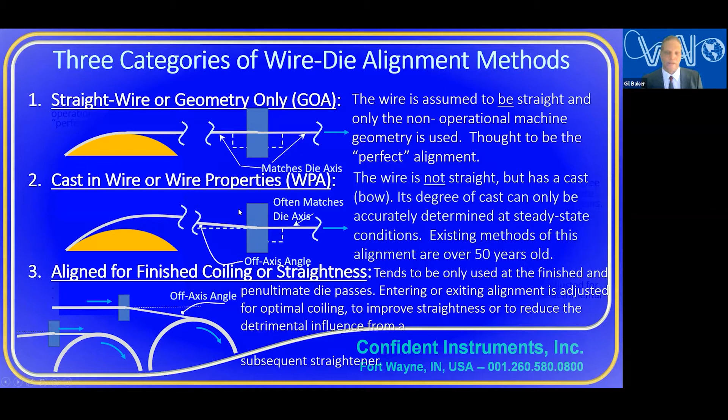We could discuss aligned for finished coiling or straightness - another category where manufacturers purposely put an angle from the exiting wire to the die axis, or they could put an angle from the entering wire to the die axis. This will control the cast and the helix on the finished wire so that you can spool very nicely onto the spool, giving more optimal spooling. It's also used to optimize straightness or to minimize the impact of a straightening device afterwards, because they're useful, but straightening devices also will impact the quality of the wire.

I was working on a robotic microphone about 2 decades ago, and I met somebody from the recording industry, which I wasn't familiar with, and he wanted to tell me something. He said an inch is worth $1,000. What he means is that moving the microphone to the right place - here you see 3 different microphones, they might switch back and forth or combine them - moving it into the right place to hear the music, even an inch, can be worth $1,000 worth of expensive recording equipment. I think this is a very good analogy for what we're doing.

We're moving the alignment of the die just a little bit, maybe half a degree, and that is creating an improved condition in the die without increasing the quality of lubricant, the quality of dies, or any other expensive issue. It's quite interesting, this analogy, because, for example, if someone told me to put a microphone near a guitar, I'd put it right at the mouth of the guitar. But that's not the optimum - the optimum is further away. I don't know why; the sound is coming from everywhere, not just the mouth, I assume. But again, die alignment is also non-intuitive.

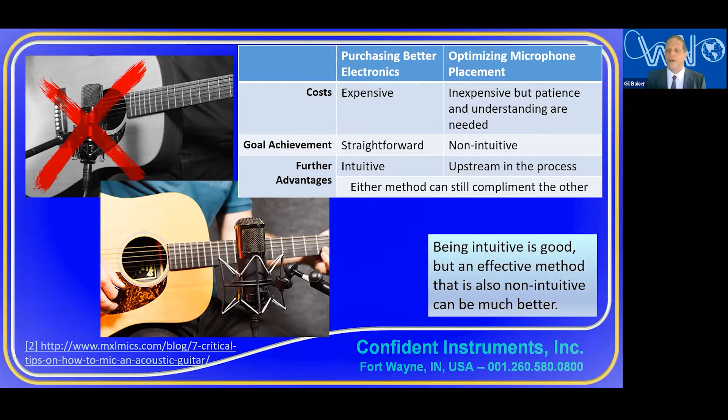A further advantage is that the microphone movement is upstream in the process. It captures the initial sound, and then it's processed later by the expensive equipment, which still can be expensive. Similarly, in die alignment, if you don't have the die aligned properly, it doesn't matter how much expense you're putting into the lubricant and die - there are still going to be issues that could have been resolved.

Let me go over what we're going to discuss today. I'm not going to get to everything, but I'm talking about a different type of alignment than straight alignment. We won't talk much about straight alignment, but this alignment is straight - it just depends on the geometry and the equipment. I'm talking about when there's a strong cast or a bow in the wire, how you have to optimize it with a different technique. And I'll discuss what processes can especially benefit, and touch lightly on measuring the alignment.

Now I'm going to really go into this subject for a while. What I'm discussing here is deconstructing typical wire drawing, because a lot of times we just see wire drawing as a picture of a die, and there's a lot more going on.

Existing alignment methods for using this alignment with the strong cast have been in use for over 50 years. There's a number of methods - I put some in my article, but I'm going to touch on two low-cost methods today and assessments for aligning the die. I'm also going to talk about laser alignment measuring methods - I'll just touch on that.

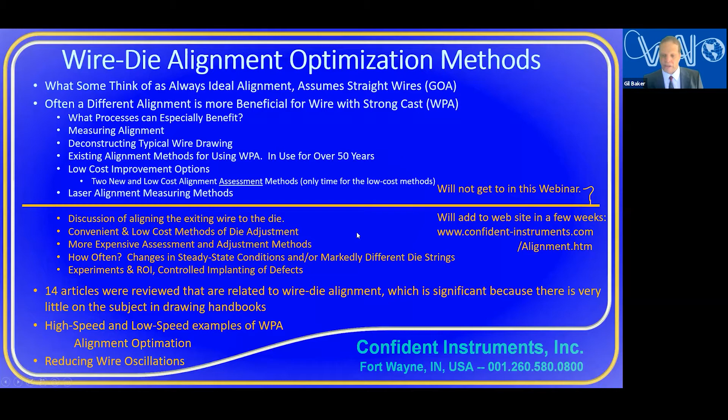Now, what processes can especially benefit? Number one, hydrodynamic lubrication, of course, is great. It's a great boon to wire drawing as you go at a higher speed, but it's a very fragile dynamic. The film thickness from the lubricant is fragile. Anything that would disturb it is going to reduce the film thickness and cause more frictional heating and contact between the wire and the die.

So when you just have slight perturbations to the hydrodynamic lubrication, either through this unoptimal alignment or through wire oscillations, you are deteriorating your hydrodynamic lubrication. The wire temperatures are going to increase.

And that brings it to the next one - when you want to reach higher drawing speeds, you really need to keep the wire temperature lower, because if the wire temperature gets too high, then you cannot draw faster at all. This is especially true in steels, where higher temperatures can cause brittleness.

And finally, there's where you have a finished straightness needed. Then again, really pay attention to optimizing the alignment for maximum straightness. And even if you're straightening afterwards, you want to minimize the impact of your straightener.

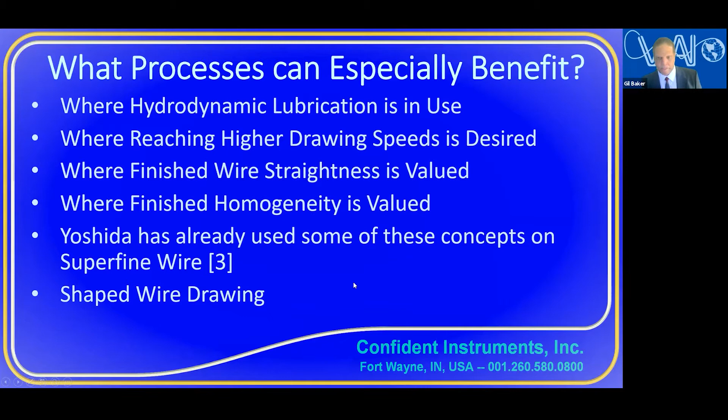I'm going to go back to these two categories one more time. So you have straight wire, and that is only governed by the geometry of the machine. You're assuming the wire is traveling straight between the capstans and the spools or whatever, and it's only governed by the geometry. People assume that's the perfect alignment.

What I'm discussing mostly here is what I call the wire properties alignment. I say wire properties because when the wire properties change, the alignment must change. A lot of times it will change just a little bit, but if you have to string a new die set that's dramatically different than the other die string, then that causes a big change - for example, in number of wraps, die back tension, things like that.

So this type of alignment is important when there is a cast in the wire. And it's really easy to measure whether there is a cast in the wire or not, and how much significance that will play. So we'll get onto that later.

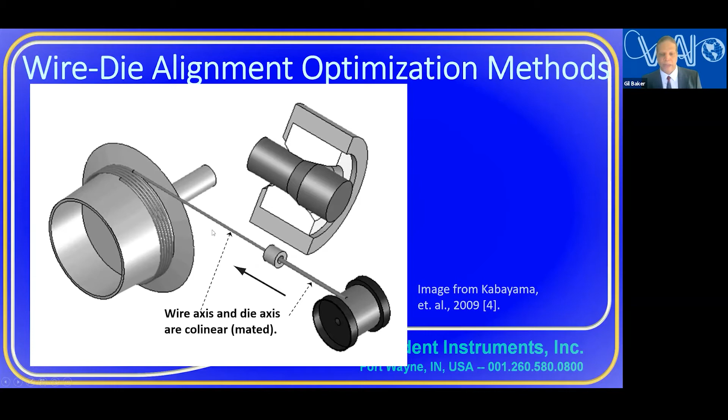So again, this is a picture of straight alignment. The wire is just - you're coming off the spool, going into the die and going onto a bull block. And again, the wire axis and the die axis mate here and here, entering and exiting.

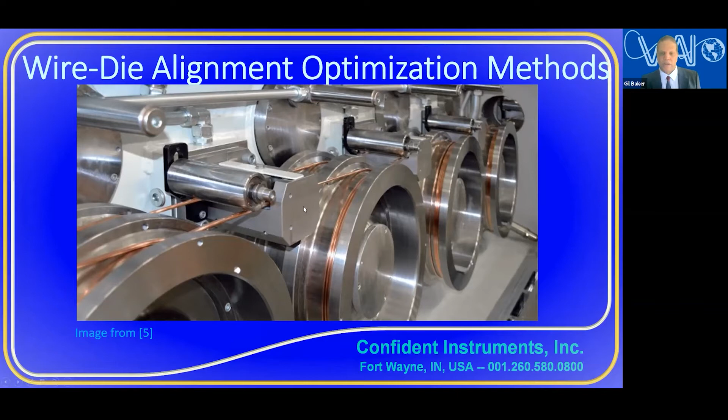Here's another example, but here you have a roll that seems to be adjustable, and that's going to change your alignment. There's a lot of things that will change even straight alignment. I'm not going to discuss that here, but I just want to make people aware that as we add different complexities, such as cone type and other complexities, we are going also off the straight alignment.

Alignment measuring - if you want to measure the alignment, a lot of times the die holders are already aligned coming from the OEM. So they're fixed, and a lot of times people don't even bother checking what position they're in. But actually, even some OEMs will put in a different alignment. You might be surprised. So you could check that, but you might be happy with how it's set.

A lot of people like to use a laser. There's intricacies with using a laser that we're going to go into later.

But they use it because it's used for machine alignment.

Another option is a taut flexible string. Again, this is only for straight alignment, where the string will be fully taut, and the string will be straight due to the tension wherever it moves.

You could do a similar thing with an insulated stranded wire, stripping half the wire and leaving insulation on the other. The change from insulated wire to bare stranded wire gives you a change in diameter similar to wire drawing. You could also use the bare stranded wire as a continuity check between the die and the wire, such that the strand will pass straight through the die when it's perfectly aligned.

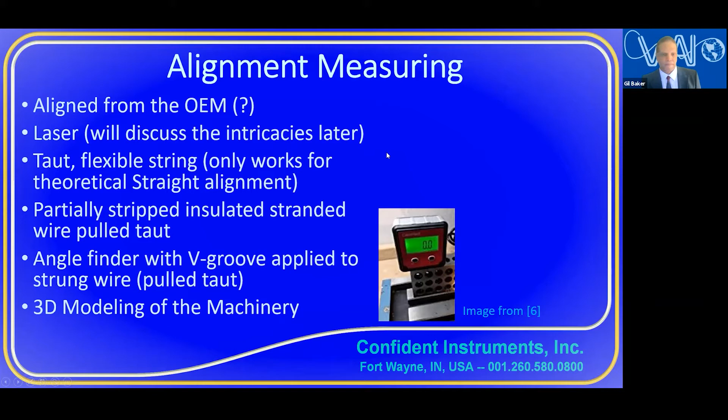This is what I'm going to really stress in this presentation: deconstructing typical wire drawing. Again, a lot of times you'll see a picture of wire drawing with a die and a nice conical wire going through it, but there's a lot of other things going on, maybe in the background, so to speak.

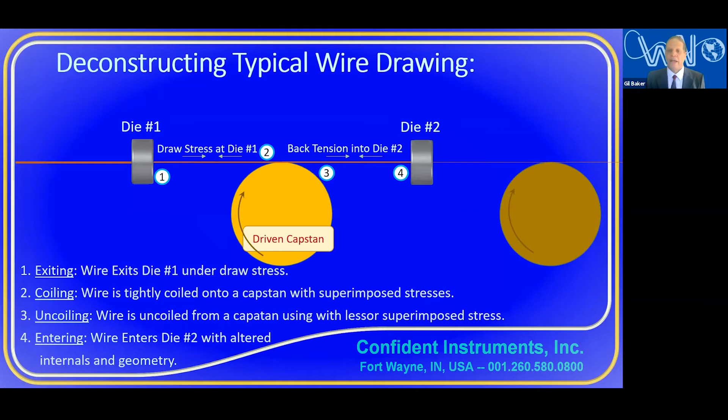So we're going to talk about one where we call this die 1, and the wire is exiting that die. What's happening there? Then 2, it coils onto a capstan. 3, uncoiling from that same capstan. And 4, entering die 2. We're going to see what that's going to look like. Again, this is just a simple illustration, and you might have something that looks different or more complex.

So starting with the first condition, what happens when the wire exits a die? We're going to forget about reeling off a coil or anything like that. We're going to assume the wire is perfectly straight, meaning it would remain straight when draw stress is removed. When I keep talking about straight or cast...

If you pull a wire, you can make it very straight, but if it has a cast and you release the tension, it'll go. So we're going to assume for now that this wire is coming out straight. The wire has a perfectly round cross section. Again, we're going to assume that the die's bearing is perfectly round and the wire comes out perfectly round.

The wire has imposed stress upon it—that's an important part, and that's the draw stress. The wire will also have residual stresses induced upon it when it cools.

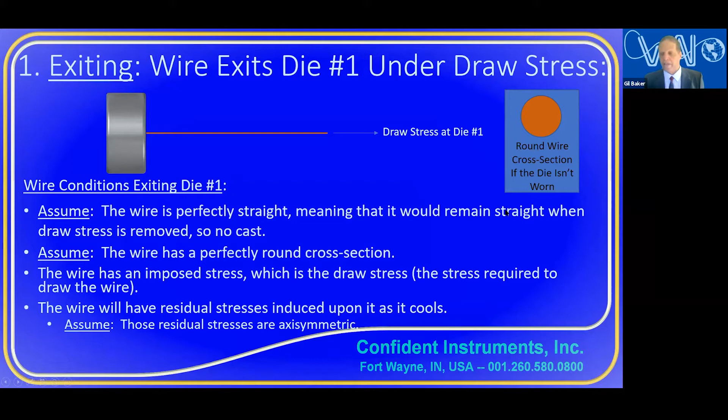For now, we're going to assume those residual stresses are axisymmetric. Axisymmetric is typically how you think of a round wire with a round cross section. I could just call it symmetric, but we're going to talk about asymmetric later. So there are residual stresses in the wire coming out of the die.

Well, the wire comes out without any residual stresses, but there are temperature gradients in the wire. Typically at the speeds we run in production, the surface temperature of the wire is going to be much hotter than the center. So as the wire comes out the die, the surface contracts as the temperature equilibrates, and as it cools a little, the surface contracts.

So it's got the tension pulling it, and that tension pulling it causes a compression at the center. So now this is what we have in typical manufactured wire: we have residual stresses, and we're again calling this axisymmetric residual stresses. It's symmetric about this line.

There are a number of ways of measuring residual stress, and I'm not going to go into that. There's a lot of complex devices, but I want to illustrate what residual stresses are by showing some mechanical means of measuring them. So let's say you had a bar.

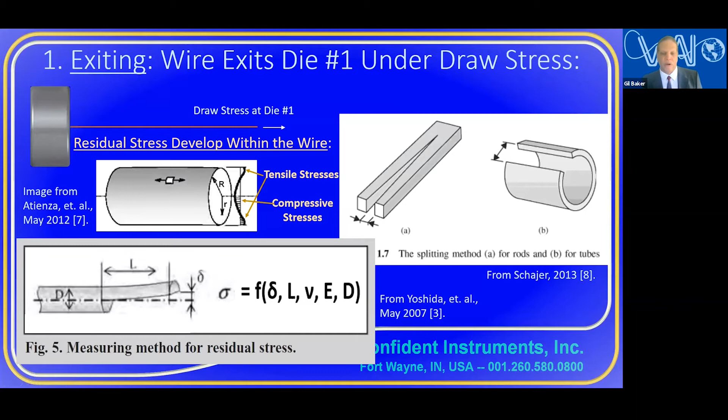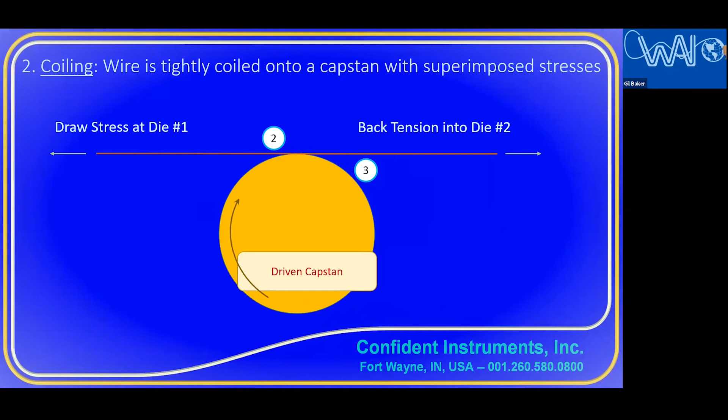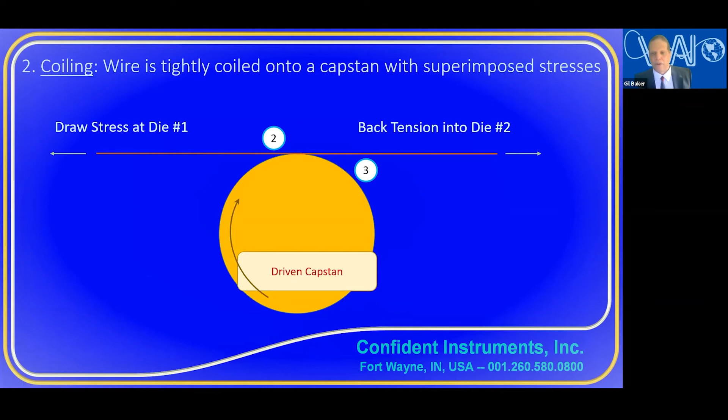Going to the second part of our deconstruction: when the wire comes to the capstan, it coils, and that's not necessarily a simple process. So we're going to look at that, and just give you some illustrations.

Let's say you had a rigid device, and a fixture that's revolving around a mandrel, causing the wire to bend 180 degrees. Now, if the wire remains completely elastic in this process, when you release this fixture, you're going to have the wire spring back as if nothing had happened. There's no history or memory of what occurred; it's going to look just as straight as it was.

However, if there's yielding, and that's mainly given by the ratio of the wire diameter to the mandrel diameter, then there'll be spring back, but not all the way back to straight. There will remain a curve in the wire, again, like the cast we talked about for the coil. But this is just for a sliding fixture.

What if you superimpose tension? That's what happens in wire drawing, superimposing tension on both the entering and exiting wire as it goes around a capstan. In that case, there'll be much less spring back because there's more yielding in tension, creating a tighter wind around the mandrel. I wanted to illustrate that because this is often the problem we're having, where now we have a greater influence upon the wire, less spring back.

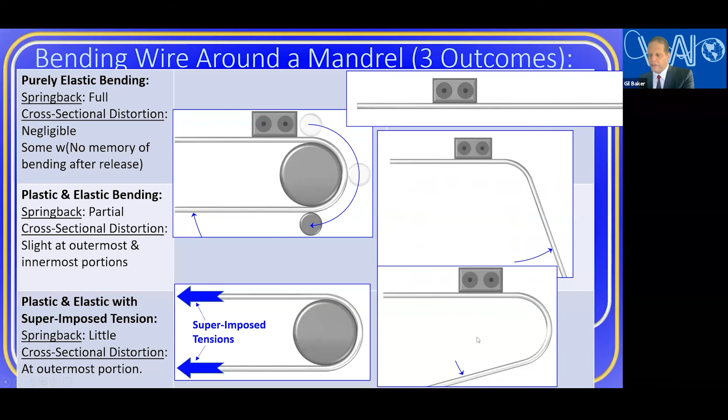Now, the next thing we do is uncoiling, number 3. So now we want to uncoil that wire, as I showed you previously, that has the shape already set into it. Unless there's more devices here, we're typically just doing that with the back tension and the motor revolving of the capstan, so we have to get from being coiled to straightened in some way.

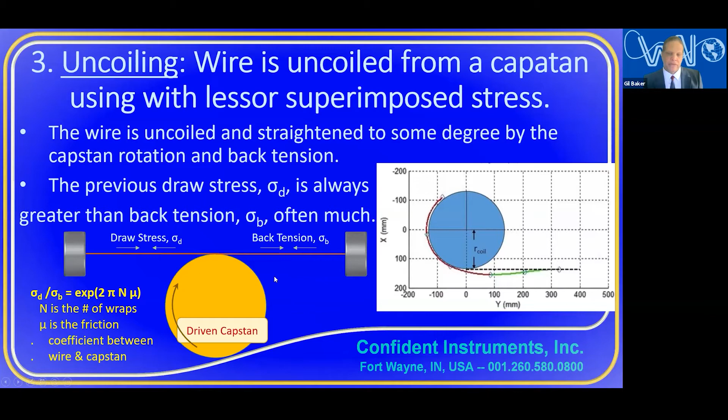So that is really the problem and why we need a different alignment type. In uncoiling, if the wire is perfectly elastic, well, that's fine. But if there was yielding, both on coiling and uncoiling, it makes the scenario harder, that the wire would be straightened just by back tension. And the lower the back tension, the less the straightening.

So the ultimate result is there's often a complex asymmetric, not axisymmetric, residual stress in the wire. We mentioned this is axisymmetric coming out of die 1, assuming it was axisymmetric. But then you had the coiling transformation, that's asymmetric, and the uncoiling transformation, also asymmetric. So you might end up with a shape like this. I just made this up, but I know there will be compression in the wire here, and there might be a little bit of tension here from the uncoiling.

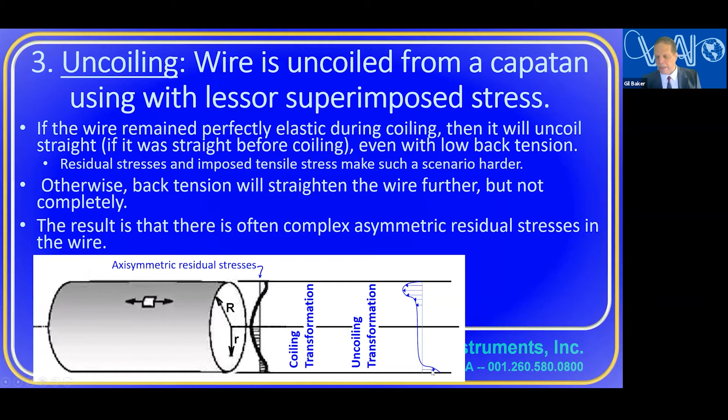So I combined this where you have this wire coming in with low back tension, so it's coming in with a cast. You would see the cast because the back tension is so low—you'd see it between the capstan and the die. And it's coming in at an angle. There's not really residual stresses, because the residual stresses are mostly causing it to curve. Let me go back to the previous—so it considers no residual stresses, and the wire is forced to enter at an angle to the die axis.

Now the second extreme is the back tension is high enough to pull, to cause the wire to move straight. And even though the wire moves straight, it's not that simple, because here in the bottom one, we're assuming the wire is moving straight. But because of, for example, compressive residual stresses—again, asymmetric residual stresses—it causes a change in the deformation zone. It's not the neat, trapezoidal deformation zone we typically see. And you see that this angle is different. Well, here where there's compressive residual stress...

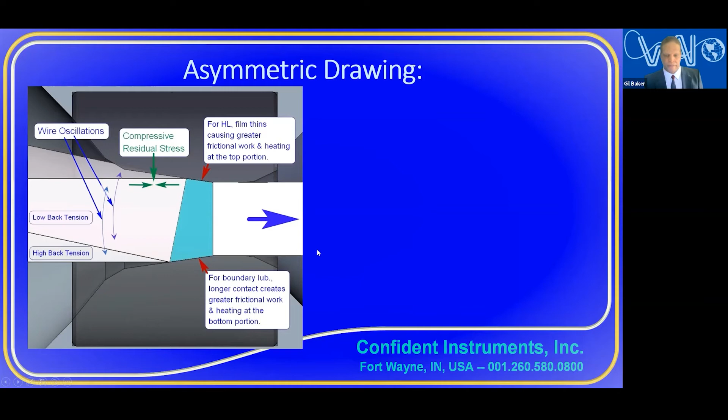Finally, another interesting thing, and I talk about this more in the article, is that asymmetric drawing creates asymmetric wire at the end. I did touch on that a bit when I mentioned three categories—in the last one, I said people were purposely changing the angle of the wire entering or exiting the die. When the wire enters the die at an angle, asymmetrically, there's asymmetry in the exiting wire. It's not like the wire we discussed at die 1, where it's round—I mean it is round, but it has no asymmetric residual stresses.

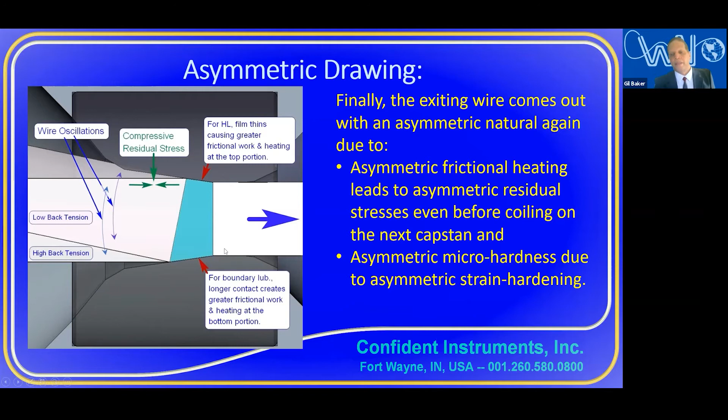So what's going to happen is, for example, it'll be hotter—the surface temperature will get hotter, especially with hydrodynamic lubrication. That's going to cool down further and create greater tension here than where the wire surface was cooler. But the second thing is that when a particle of metal goes through this part of the deformation zone, you're going to have more strain hardening. So for microhardness, you'll have a harder material up here than down here. So two things make the exiting wire asymmetric.

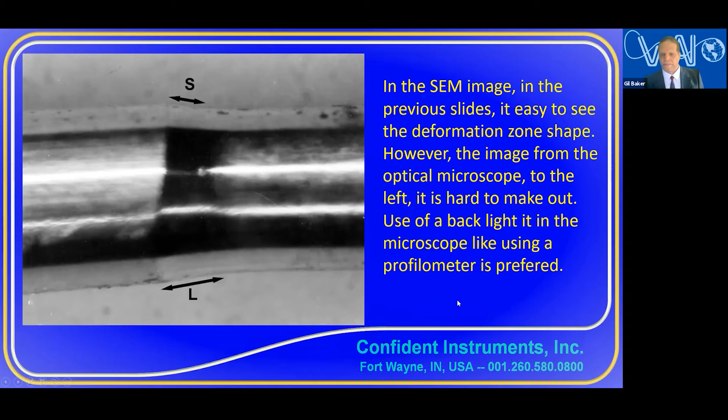Now, a lot of people are asking, what factors cause cast? Again, it's very easy to measure cast, so that's probably the first thing you should do. But what parameters influence it? People want to know what processes are going to have more cast. The main parameter is the wire to capstan diameter ratio.

I kind of showed that with the wire on the mandrel. If a little wire is on a big mandrel, it might stay elastic. But if a big wire is on a small mandrel, then you're going to have more yielding. That's especially the case of cone type wire, cone type drawing, because the wire comes in at the largest diameter on the smallest capstan, and the cones go up from there.

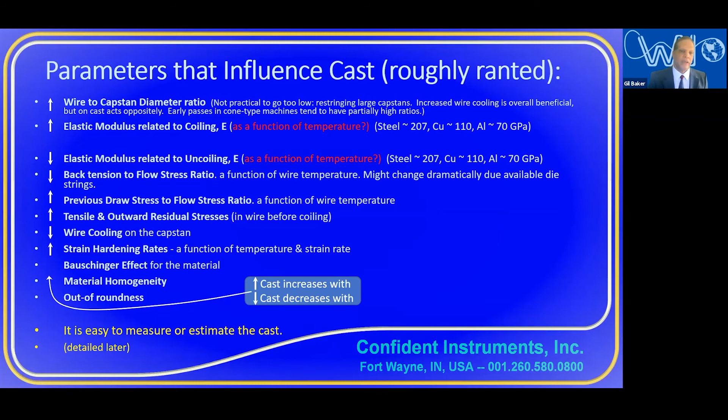So I mentioned on this first slide, the main issue is wire to capstan diameter ratio. But it doesn't mean you could just make your capstans as high as you want, because there's a cost to restringing the dies - it takes longer with a larger capstan, and the machine will be bigger. But let's just take that issue.

Here, imagine a wire going, and this one has a large capstan, so the wire to capstan diameter ratio is going to be low here. Then let's take another example of a wire that's pulled through on a capstan, and that capstan is maybe about half the size in diameter, so here you have a high wire to capstan diameter ratio.

So we come through here. This wire starts out straight. This wire, we can assume, also starts out straight. After just the coiling and uncoiling, we have a wire with very little cast - low wire to capstan diameter ratio.

However, when you have the higher wire to capstan diameter ratio, after it comes off coiling, you're going to have a cast in your wire. This is showing the cast with no tension, meaning the back tension might show the wire straight into the die, but in fact, if you took off the tension, this wire would have a cast to it, or a bowing, or a camber.

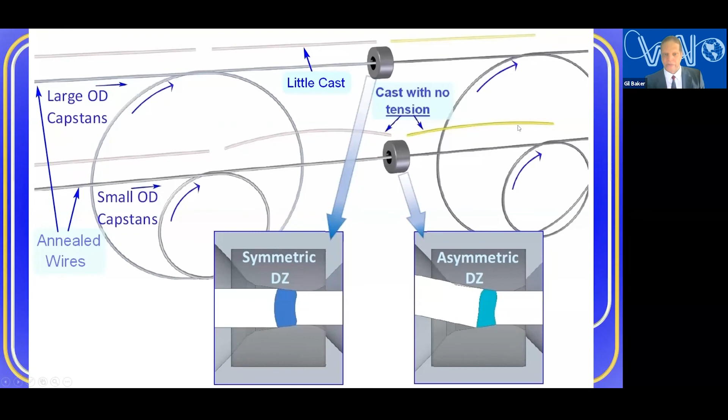Now, there are existing alignment methods where you consider the cast as a steady state issue, not something you can just measure in the machine geometry. Most of those methods, for about 50 years, have used die wear analysis to determine how to optimize alignment, with the goal of maintaining as axisymmetric or symmetric a die wear as possible.

So this involves examining the dies. One method is just looking at worn dies. Maybe you've used the dies long enough and you want to replace them, so you just look at the worn dies. Now, whether or not you have had those dies prevented from rotating through their service life, you'd have to ask someone else about that. But you definitely want to look at those dies coming out of service.

Now, the second way this is used is you can string in a set of rapidly wearing dies. For example, most people are using various types of diamond dies nowadays, so if you put in a tungsten carbide die, it will wear much faster. Or if you have a soft metal, you might even use tool steel to get a rapid wearing die. Now, again, you want to prevent the die rotation, and this would be just drawing over a few hours.

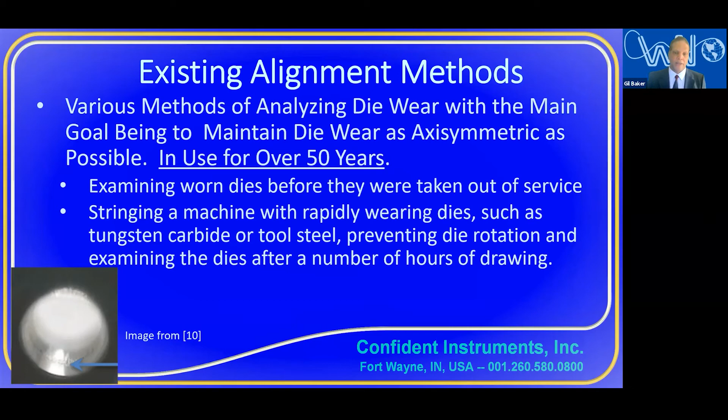And after those hours of drawing, you want to examine the die and see if there's a symmetric deformation zone. Now, again, with cast, there'll never be a symmetric deformation zone, but you can adjust the alignment such that you can improve the deformation zone.

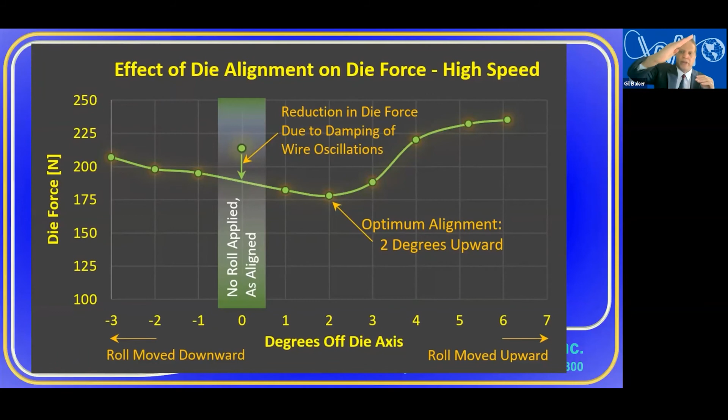In the article, we go into a high-speed alignment optimizing experiment. In that experiment, we determined that we wanted 2 degrees off the die axis in the upward direction. In other words, here's the capstan, and the wire is coming in a little bit upward. Again, I'm not going to go through all this, that's in the article.

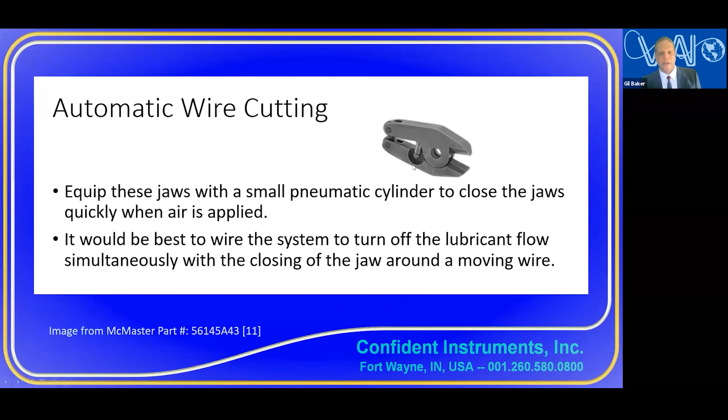So the methods of measuring cast, I'm just going to touch on 2 simple and low-cost ones. You can either create a break in the wire while the machine is running, by running the wire through a jaw that clamps quickly, pneumatically for example. Or you could go in and do your analysis when there's a natural wire break. In those cases, you're preserving what's going on in the deformation zone downstream of the break, so now we can look and see what the deformation zone looks like before you have to pull the wire out of the die.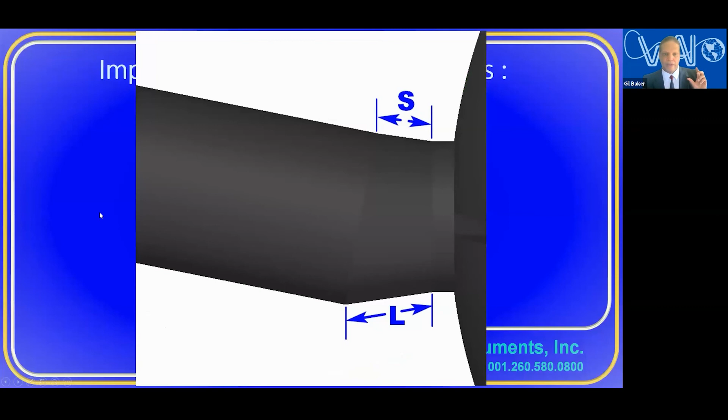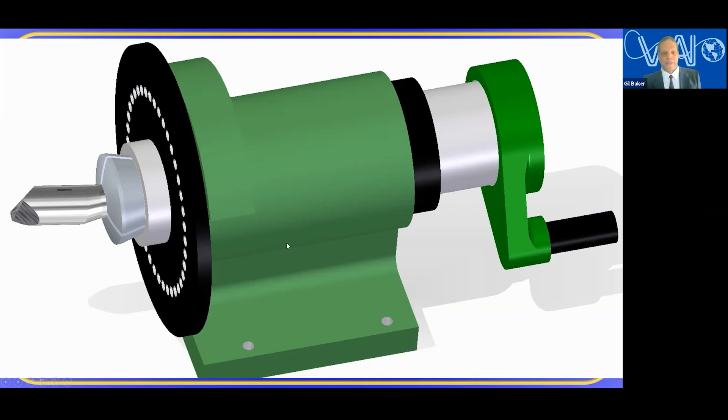Of course, I would mark everything relative to the die so you're able to orient yourself. Here's an example of a wire with the mark where it was relative to the die. What you're going to do is look at and measure the S and the L, with L being the longest length in the deformation zone and S being the shortest length. I put it in a collet because it's a more exact measurement, especially if the cast is not in the same plane as the 12 o'clock of the die. That's also discussed in the article. So here again is the S and the L, and there's an equation in the article for this.

The next way is to measure cast itself. I'm not sure if this is easier or harder, but you have been drawing wire through some dies, and perhaps there was a break. Now you need to loosen up, so maybe pull some more wire from this die to loosen the wire here, so that there's no back tension imposed upon it. So this whole wire is loose now. You need some kind of clamp to hold that wire to the capstan where the wire was exiting the capstan, here maybe at the 12 o'clock part, but it could have been exiting another part. So the first thing you do is put kind of a clamp or a press to hold that there.

You're going to know the length, and you can make this measurement. You can create a line here with a laser, or use a stiff rod or something to create a line, and then measure this. This can be done with a photograph adjusted probably with a scale to make sure you have it at the right angle.

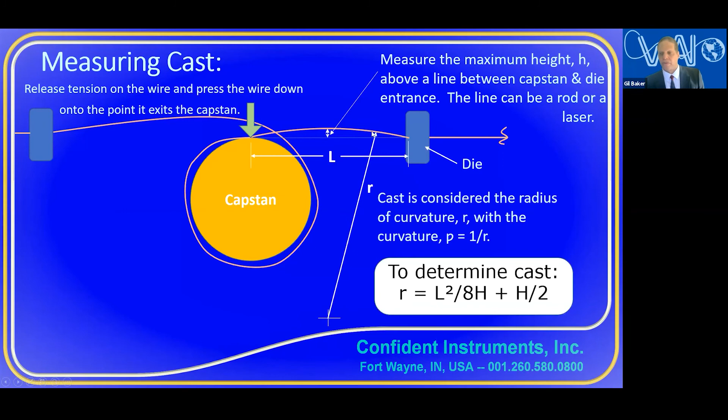So I mentioned two low-cost methods of measuring the issues in alignment. I think that measuring the deformation zone itself and measuring the cast itself are more immediate and more direct than measuring die wear or anything else. There are some more complex load cells and things like that, like we did with the high-speed experiment, but that is a low-cost method.

They take time. And also there are low-cost methods where you don't have adjustable die holders. Many people don't have adjustable die holders. So there are low-cost methods there, and I mentioned them in the article, and probably I'll put them on the website later.

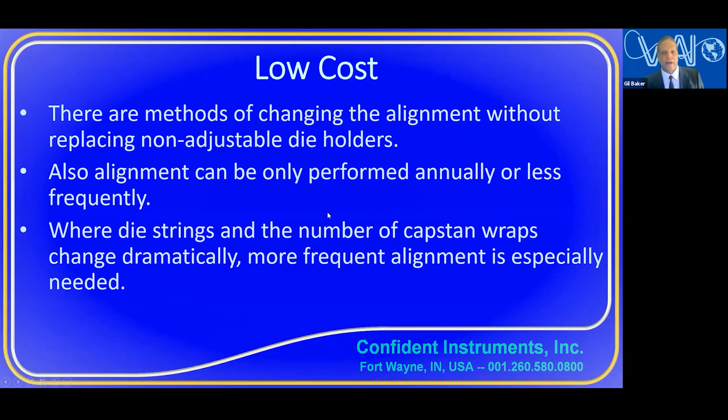Also, you don't have to align the die every week or every day, but you would if you're changing die strings dramatically, things like that. But if you wanted to measure alignment and adjust alignment annually, then again, you could do that when you have some downtime. It's really not a high cost method of improving the drawing process.

So finally, I'd like to mention before about methods of checking the alignment. A lot of people like to use lasers. I'm not sure if that's the best thing. There are some issues with using a laser. Of course, eye safety, depending on the laser, is one important thing. But people use lasers, they see it on the CSI, or fancy machines are aligned with lasers.

The issues - first of all, we've actually developed a product to make it compact. A lot of the other systems are too big, and also easy to adjust. You think it's going to be easy to adjust a laser, but it's not like putting a physical rod into a wire or into a die, or a string or anything into a die. You don't have that physical constraint to help you.

So what we have designed is something that has a coarse measurement that can be done manually in 3 degrees of freedom, and then motorized or galvanometer methods to move the laser slightly at a fine pace so that you can get that precise touch. You want the laser to touch the capstan, go directly through the die and touch the other capstan.